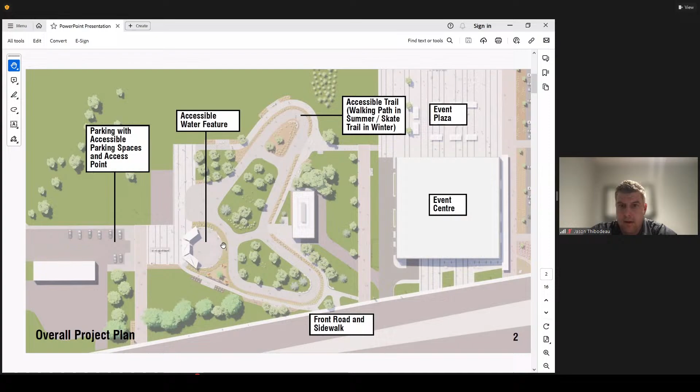So you can see here this sort of medium gray band. That's the skate trail, which is an accessible trail, fully accessible trail. It's a walking path in the summer, and it is a skate trail in the winter. And within that sort of zone is also the water feature. So those are the two sort of primary components of this particular project.

If we look at a more detailed view of this, zooming in on this area of the property, obviously the slide isn't able to capture it all because it's quite large, but you can see it's cropped a bit at the top. The main area here is the water feature.

The water feature will have shade sails. There is a plaza here, and that plaza has a jumbo LaSalle sign, which is an illuminated sign and forms part of a larger plaza.

We do have the skate trail here, as I mentioned before, a multi-purpose path. In the summer, in nice weather, it can be used for leisurely walking, maybe even some rollerblading, and obviously in the winter it would be used for the skate trail itself.

It has a number of cross loops which foster smaller circular movements within the skate trail, but overall it represents approximately a 900 lineal foot skate trail.

There is a memorial garden tucked in one of the corners. Its perimeter is enveloped with continuous accessible walking paths. So you have both the skate trail, which in the winter when the ice is made is used as a skate trail, and we still have a full walking accessible path that wraps around it, with a landscape buffer that separates it.

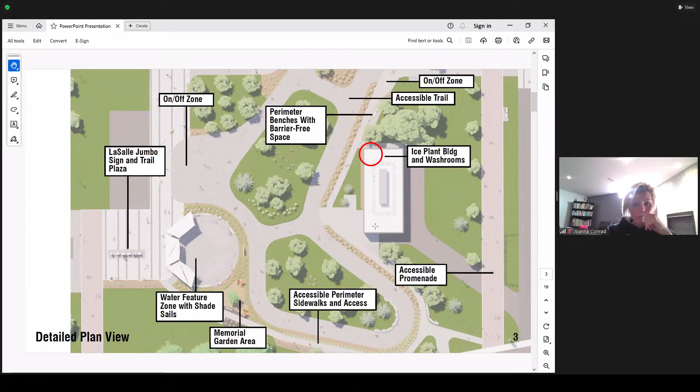As I mentioned, we have washrooms in this ice plant building. So the ice plant building houses the operational aspect needed for the ice, but also the refrigeration and some...

For those of you that are on Zoom, can you hear me speaking? Okay. So I don't believe anybody on Zoom can hear us, and we can't see you on the screen, so I don't know if Greg can fix the screen so that we can see everyone. Maybe they can give us a thumbs up if they can hear.

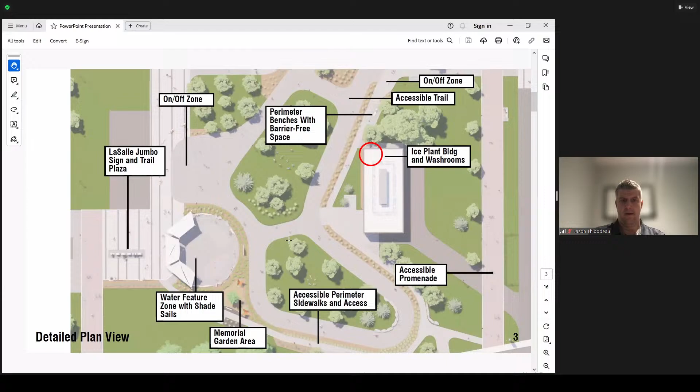So here's an overall sort of aerial or bird's eye view. This is looking northwest. You can see the water feature in the foreground, and even before that, on the bottom left corner, is the large LaSalle sign, which will form part of a plaza. The hope is that there will be a future pavilion in this area. Effectively, you see the seamless surface, so you have the perimeter path here. You have the skate trail and the active summer trail wrapping all around here. It's a 16-foot wide trail.

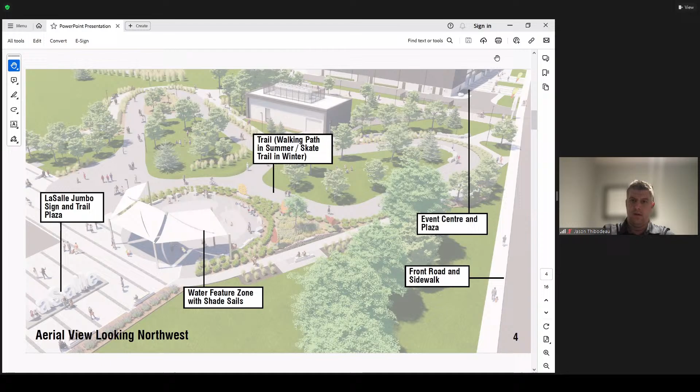You see the event center in the distance, this is the ice plant building, so the door there is for the Zamboni. And the front, just for orientation, the front road sidewalk runs up the east side. So you see in the distance here, you'll see the perimeter sidewalk connects with the existing municipal right-of-way sidewalk. So there is a nice connection to the Huron Street intersection and access into this entire park.

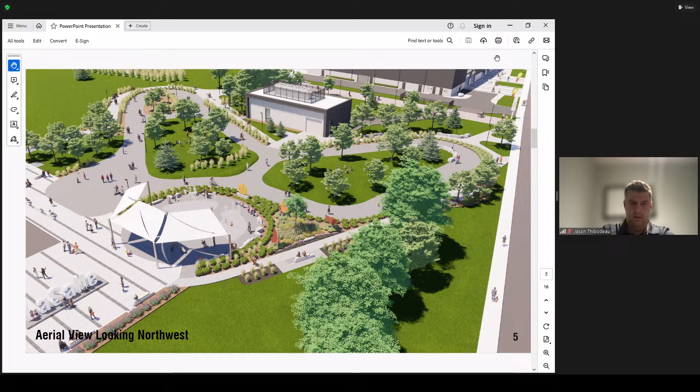So we'll go to the next slide. There's kind of the same image, but I've just lost the text so you can see that a bit clearer. Go to the next slide. So this is kind of down at ground level, you can see the promenade, which is here, the plaza. So we have level surfaces at all paving transitions, so there's no steps. There's nothing there that really is an issue.

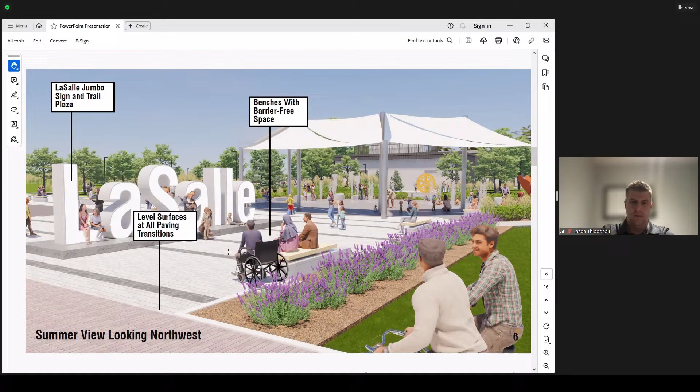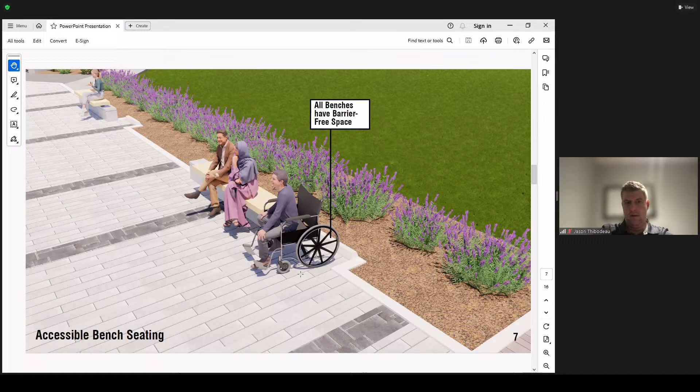We have this large sign, which is an 8-foot tall sign that's illuminated. And then this is sort of an introduction of one of the benches. So the benches include a sitting area and a barrier-free parking space. There's sort of a blow-up of that, so the idea is that users can use that bench, and it will also have some power for ease of use and technology charging, etc.

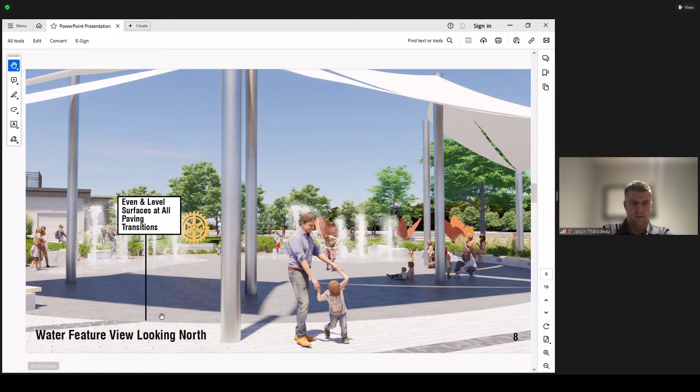There's no surface that exceeds about 2%, so that's our maximum slope. We do have some sloping to drains for the water here, and that's about it.

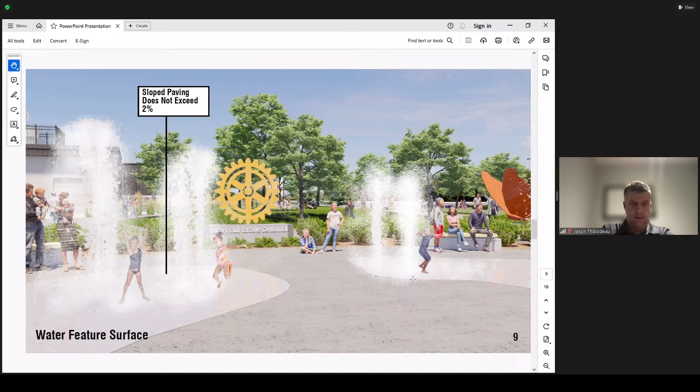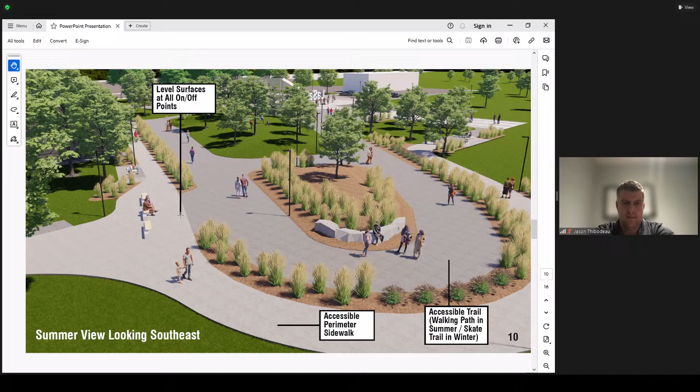One more summer shot, the last summer shot here. We have a shot of the skate trail itself, the 16-foot wide trail. We have a landscape buffer, and then the sidewalk beside it. In those islands, there are 3 islands, and we have some bermed areas and non-bermed areas. So we have some undulation of the earth, and the idea is that we use some of the soil that's already on the site for that purpose.

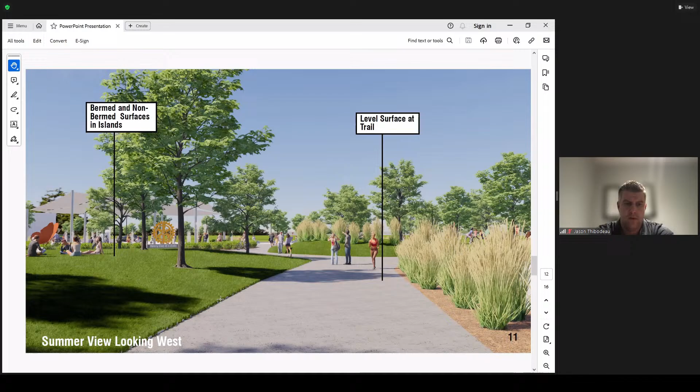This is a shot at night, the winter shot at night. The idea is that we'll have fully accessible plazas and walk areas. Here you can see the rubber matting, which will encapsulate all of those benches. We'll have full access to hopefully some nice fire pits that allow users, maybe ones coming on and off the rink, or chaperones and parents and other groups, to use the larger plaza. And then making use of the water feature area during the winter.

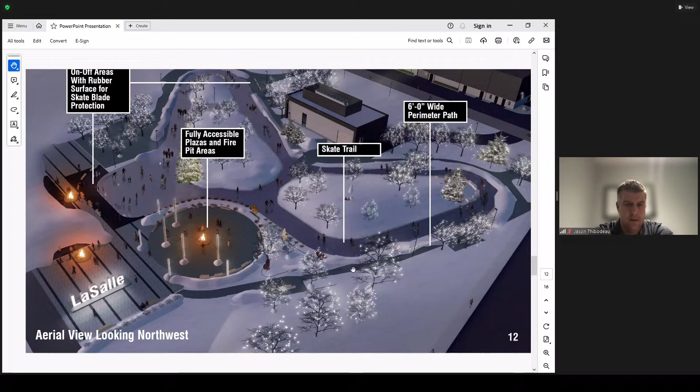Here you can see the entire skate area, which wraps around, and the perimeter path I was referring to. And there's a shot of the on-off zone, with rubber matting, the benches, and some rails which are there primarily for added support for users to get on and off the rink. Obviously the rink, as it gets built up, may be 3 or 4 inches in thickness, so the idea is that we would use these as assistive rails that help users of all abilities get on and off.

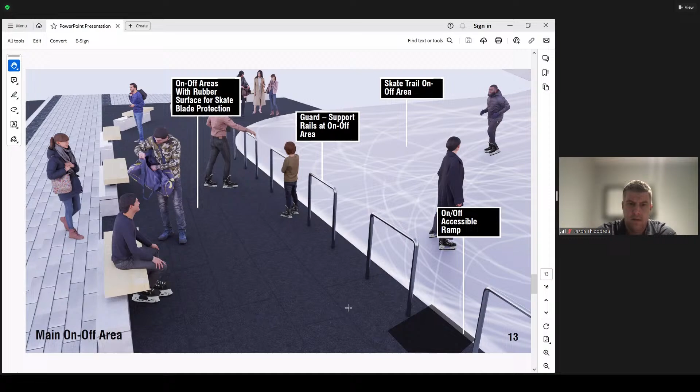This ramp is another custom ramp that would be used to bridge the gap from the existing surface. In the summer, the surface is completely level, but as the ice is built up, we've got a bit of a ramp, so we'll be using a customized ramp to that spot, which is temporary and portable, so it can be used and deployed as needed. That's a shot of it at night, giving a sense of the width, and the islands creating interest and a really experiential skate experience.

The last slide we have is the washroom, the ice plant building itself. We wanted to highlight that this building is fully accessible from the perimeter sidewalk, so from either the on-off zone just to the west of it, or from the Zamboni driveway entrance, users can access it. There are 4 washrooms here, and one is a barrier-free washroom equipped with an automatic operator, fully accessible, and a bit more generous. It's approximately 9'4" by 6'8".

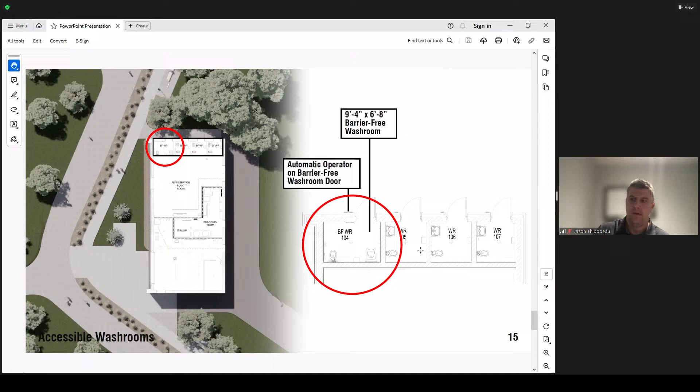And then it is supported by a series of other generous washrooms. So again, even in the winter months when you've got bulkier clothing on, everything's a bit more generous just to accommodate users in those spaces. Very easy to get to, and fully accessible.

That's the end of the presentation. Certainly, I can try to answer any questions.